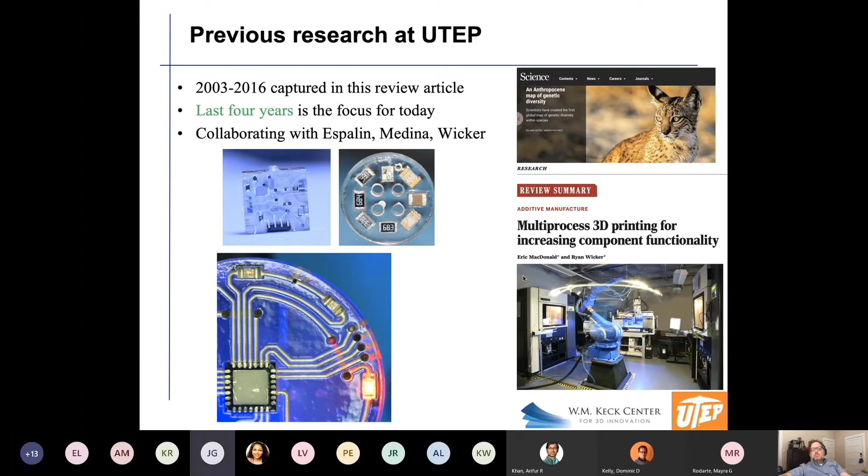In the period that I was here, 2003 to 2016, we did a lot of really interesting research at UTEP. These pictures on the bottom left show 3D printed electronics. I worked with David Espalin, Frank Medina, and Ryan Wicker in the Keck Center, and I'm really coming back for those researchers. But I'm not going to talk about that today. If you're interested, right as I left, we had a review article in the journal Science that gives a really good overview of all the work done at UTEP and at other schools. But UTEP dominated during the 2003 to 2016 timeframe. If you need that article, let me know and I can get it to you.

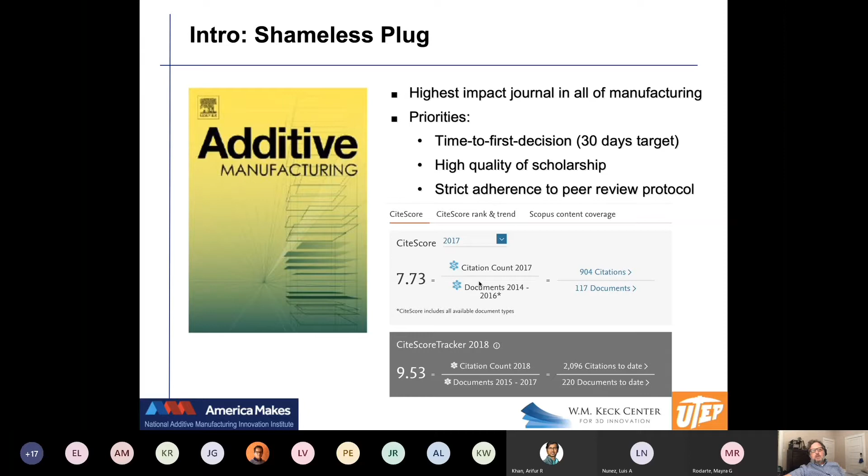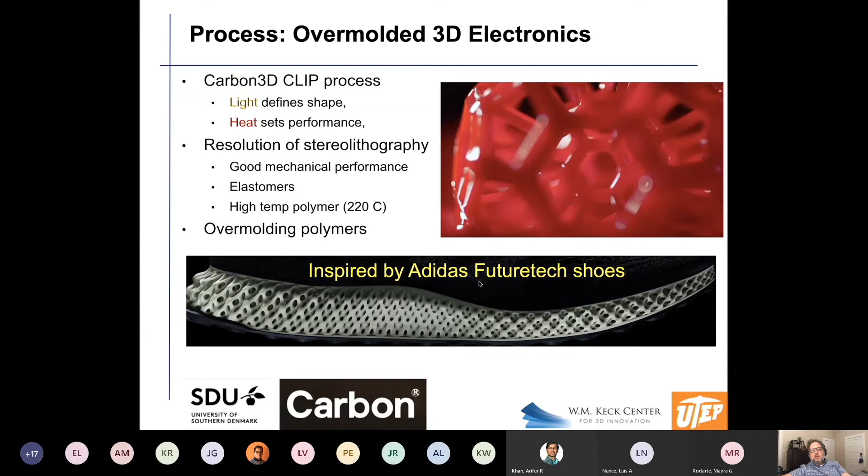So I was telling you that I'm not going to talk about what I did at UTEP, which was 3D printed electronics, but I have had about 10 or 15% of my research in the last 4 years while I've been in Ohio. I went to Youngstown State, which is the backyard university for the America Makes Institute, which is a federal institute for 3D printing.

I kind of went there to get closer to the mothership. UTEP is a satellite university of that institute. But I went there and just got access to different things and got to learn new things. And some part of my research remains 3D printed electronics, or at least when I was there.

And specifically, if you see this shoe, that photopolymerization has come a long way. There's new processes which are faster. The materials are incredible. They're durable enough that they can print shoes, which you're going to step on 100,000 times. And it's just a testament to the durability.

But what they do essentially is in one way or another use light to set the shape. And then they have some sort of thermal UV cure after the fact to sort of imbue the mechanical performance, the mechanical properties that are much better.

And so what I've been trying to do is something called overmolding, where I could take two pieces that have a complex, mating surface, and I can, like a 3D jigsaw, put these together after they've been printed, put them in the UV curing oven, and they consolidate. And the idea then is all those superficial surfaces can be populated with electronics. You could assemble it and then overmold it and cure it together.

And you can have 3D printed electronics where you have the wiring, sensors, microprocessors, just in any arbitrary location in any orientation inside of a complex structure. And so the shoe is what really got me excited.

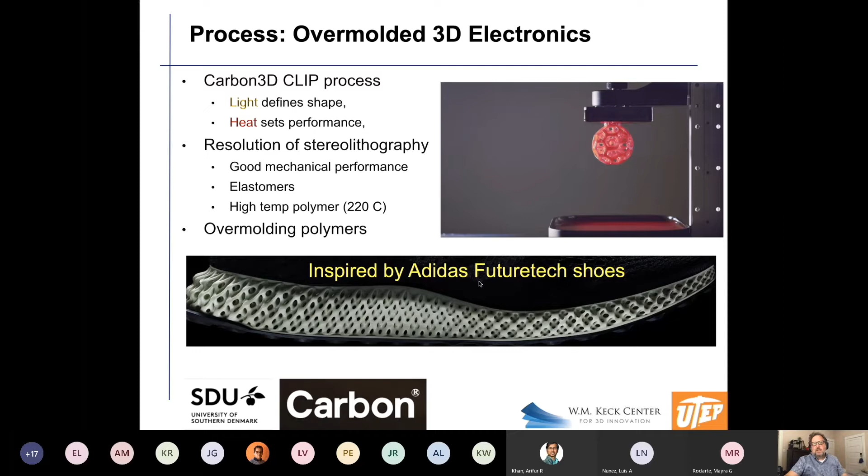I got invited by the CEO of Carbon 3D that does the Adidas shoe. Unfortunately, I never really got very far with that team. They're a startup and they're really busy. But I did get something better that I'm about to show you in a moment.

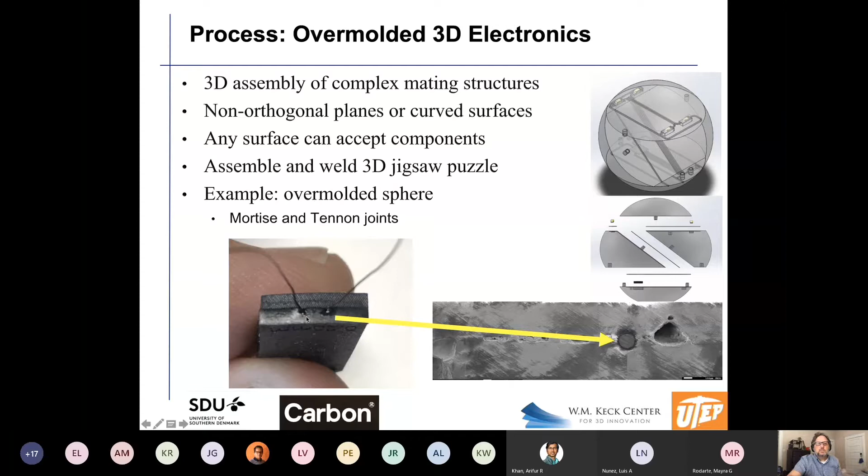So here you see the sphere to the side. You can see how it's 4 pieces, and you can see that there's electronics inside of it, and then it comes together, and it might have a mortise and tenon system to increase the surface area and help in the mechanical connection. But once you print those 4 pieces, assemble them, put them in a UV oven, it becomes a solid sphere with embedded electronics. And here's a little tensile bar with a couple wires sticking out of it, just an early example.

And so this is a video. Now, this is not Carbon. This is Formlabs, and it's a material called Rebound, which is going into the New Balance shoe. And it's not available, but I talked the company into printing this lattice structure for me, which was the work of a PhD student. And you see there's 2 wires going into it.

And I don't hit very hard. That's a little embarrassing. But the idea is that we're making a complex capacitive sensor that can measure deformation. And if you see my computer in the background, you can see that we're actually live streaming that. And that whole little red board can be consolidated down to just a small chip that can be hidden in the lattice, which is sort of the next step. And we're working on that.

I published a paper if you're interested. Anything in green text is a paper that's been published or will be. And so if you're interested, you can explore it a little bit more.

And all of this was really inspired by the fact that the NFL, the American National Football League, had a symposium in Youngstown because of America Makes, talking about this helmet challenge. So they wanted to get 3D printed helmets that could help to reduce concussions by really tailoring the mechanical performance of the padding inside the helmet with spatially varying lattices and so forth.

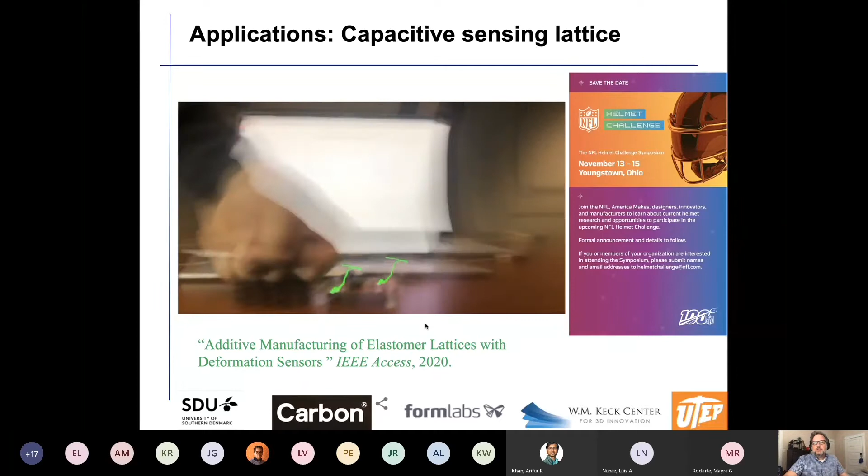Okay, so this is kind of interesting. I just want to point this out because there's a lot of grad students in here. Publishing papers in journal articles is the foundation of everything I do. Every project I work on, it's moving toward a journal article. And then that journal article can turn into a proposal and so forth.

But one thing that's interesting in today's age is that social media has become more important. And that video I just showed you, I put on LinkedIn, and it got 100,000 views. And it's fascinating to see who was watching it. Airbus, almost 300 people at Apple saw that video. Boeing, Intel. Siemens is a part of my team that I worked on with the NFL, so that's not surprising that they had a lot of people. But you could just see that it's all over the world.

India, France, New York, Boston, the Bay Area. And so it's just something to think about that, as a researcher, I'm really kind of a used car salesman. I'm out selling my stuff, right? Saying, look, I've got the solution, give me some funding and let me pay my grad students to go and explore it for you. And this is, I think, a powerful new avenue.

I think you still have to publish those stodgy journal articles, but I think at the same time, 10 or 20-second videos that quickly get to the point and show a compelling story are very important in today's age of Facebook and Twitter.

So just a couple more cool videos. This was a paper we just submitted, but we're trying different types of materials and different lattice structures. Siemens, a group at Princeton, New Jersey, in their advanced research group, has a geometry generation software group. They generated the lattice here, which is spatially varying. And then we took 2 materials, one that was compliant and one that was more stiff. And we are looking at high-speed imaging here of absorbing energy. And we made it to the very final stage in the NFL challenge.

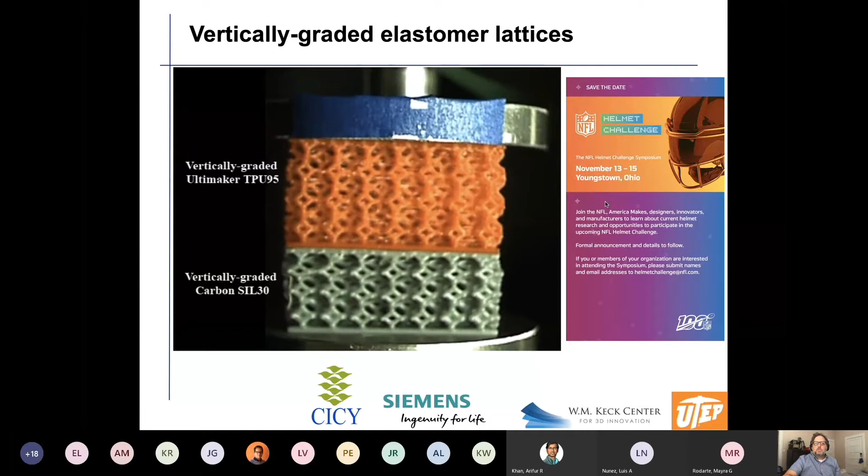There was $1 million up front that you could get, up to $1 million or share. But we didn't have a helmet manufacturer on our team, so we didn't make the final cut. But those that did are now in a 1-year contest that next summer they will hit a helmet at 6 different locations at 3 different speeds, and they have some sort of test that they can get a metric. And if you can beat a metric, there's $1 million. They do this every year. And so now that I'm at UTEP, I intend to do this again, hopefully next summer, going for the summer after that. And we're continuing these studies with Siemens. And there's also a research institute in Merida, Mexico, that is working on this with us.

And actually the football helmet challenge specifically says that you have to have a helmet that would last 10 years, as opposed to, say, a motorcycle helmet where you would throw it away if you had an accident. This would be appropriate maybe for a motorcycle helmet, but not for a football helmet. And this paper should be coming out pretty quickly. We're doing testing right now, and we're working with a company in Poland that does this material. They are the only ones so far that have this soluble material. It's just a matter of time before it becomes commercial. But we're trying to publish a paper early on.

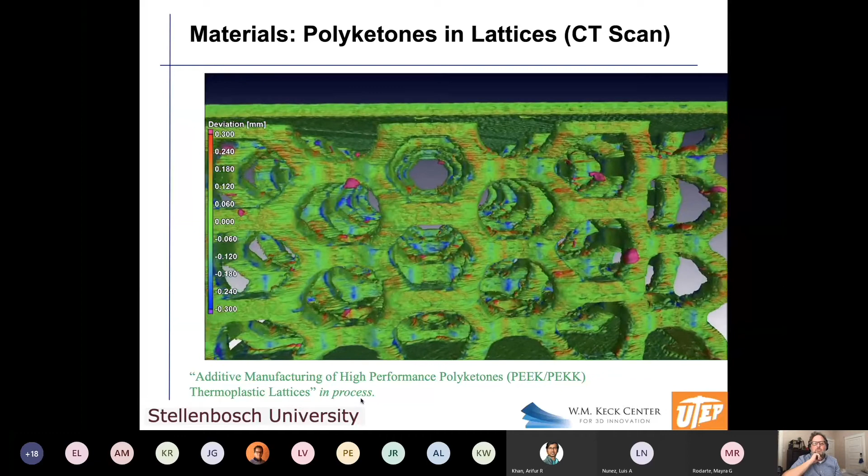And then this is interesting. This is a South African university that's helped us. They're doing CT scans. The color coding here is CAD compliance, dimensional compliance. So green is good, those pink zits are terrible. Well, they're not really a problem for the mechanical performance, but that same piece you just saw get squashed, you're gonna see the compliance of this in terms of CAD to actual.

And this always makes me want to eat Skittles whenever I see this. I don't know, do you guys see the video? I guess I'm hoping you see it. We're flying through the lattice right now. Yes, we can see it. Okay. All right. Does it make you want to eat Skittles also, or no? Is that just weird? I think nerds.

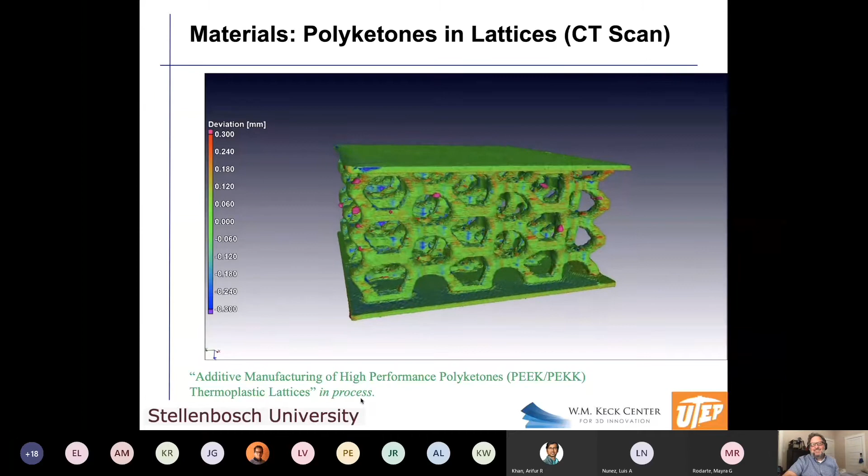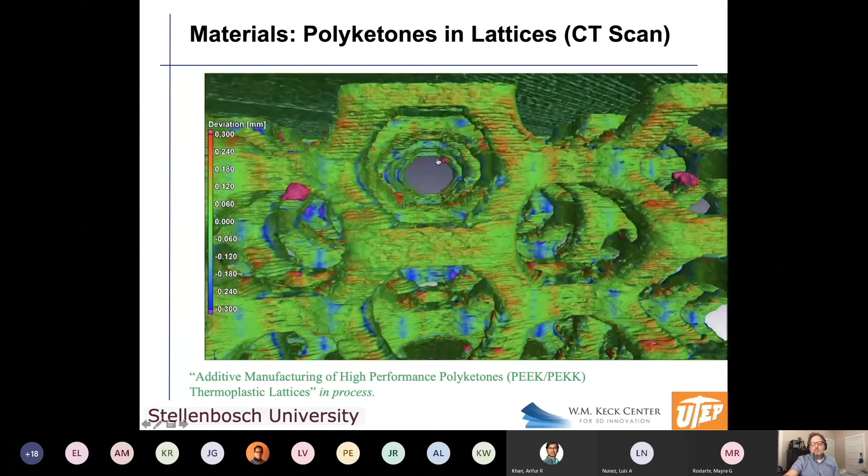Got it. But in any case, very high performance plastic now can be made where you have these overhanging structures in complex lattices. And so the idea of energy absorption, very interesting stuff, but probably not the NFL.

So, I told you that I'm not doing a whole lot of electronics, but I guess I'm continuing to show you more of them. This is something I did with Carnegie Mellon and Rutgers, where we did a microcontroller. We have a little carbon nanotube well here to make a sensor. This is one puck. We put the electronics in, connect them together with conductive inks, and then we have a top lid that goes over it.

It's a dome-like feature. And notice it has microfluidic channels that go down to the sensor, which is sensing explosives, or a precursor for explosives. Pedro Cortez is a chemical engineer that I work with at Youngstown State, and he came up with the sensor. But the idea then is we're overmolding those two pieces together. That protects the electronics, but yet we still have access to the sensor with these 3D fluidic channels. And it's just really interesting.

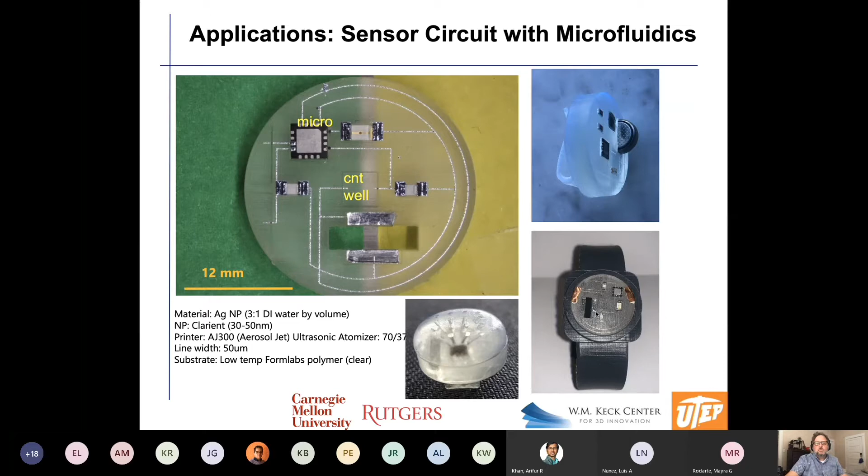And my PhD student at Youngstown State, who's still there, is working on a variety of different wearable applications of this. We don't have any publications on this, but we'll soon. And then this is kind of a cool project. This was done a long time ago at UTEP.

But I got another project at YSU where the CEO of this company, which is a Sandia spinoff, they do this aerosol jetting where they put down these ultra fine lines and can go right to a silicon chip that's unpackaged. This is basically a computer without the package. And each of those little dots on the side are like the connection points. So we can basically connect it, we can power it, we can program it. It's a full computer and it's about 2.5 millimeters on a side.

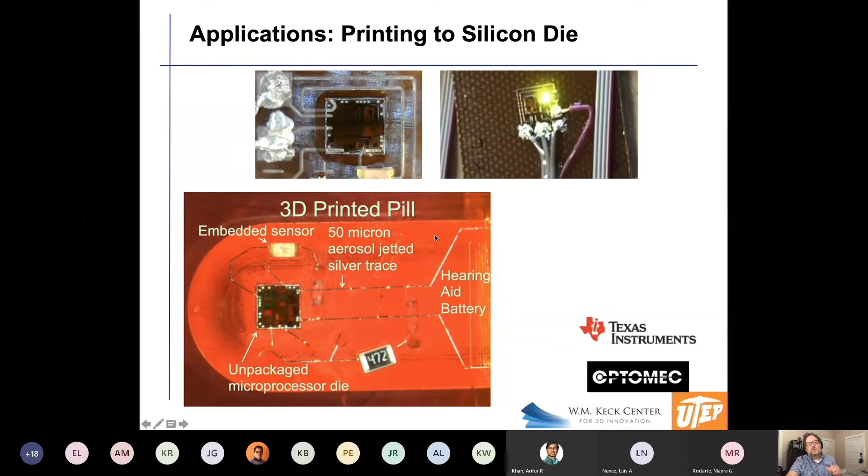And in this case, it's in a pill, so you potentially could have a computer in a pill and it would be ingestible, which is interesting. Unfortunately, this red material, I'm pretty sure is toxic. So you would never want to take this pill, but the idea just as a demonstration is kind of cool.

And I don't have anything to show about this, but at Youngstown State, we just landed $7.5 million from the Air Force Research Labs. It's congressional funding from our congressman there, who actually works with Veronica Escobar closely, but it's not like this was merit money, like where I went to the National Science Foundation, but it's still funding.

And it's trying to figure out ways to 3D print things in such a way that they have a unique signature that is impossible to replicate, so that somebody can't make a 3D printed electronic piece and say, here it is, this is what you built. And you find out later it's got some sort of latent defect intentionally introduced into it that could cause a plane to crash or something like that. In any case, I intend to continue working with Youngstown State, get some UTEP students involved in that. And there's some interesting things we can do.

And then, okay, so now I want to switch gears a little bit and say that UTEP is known for ceramic printing, but Youngstown State also has some interesting stuff. We were the first city in the United States to get an Israeli printer called the XJET. It material jets down a nano solution of ceramic particles. So you get the resolution of ink jetting, but then you have to put it into a sintering furnace to get fully dense ceramic.

And it's really interesting. This is not me. This is Draper Labs, an MIT spinoff, and it's inspired me to basically try to reproduce this. So here you see the sinusoidal disc, and in it, with aerosol jetting, you see a spiral of silver, which is an antenna. And what's cool about the zirconia ceramic, two things. One is it's low loss for electromagnetic radiation, so it lets radio waves get through. And it has a permittivity of 30, which is the highest permittivity printed near full density.

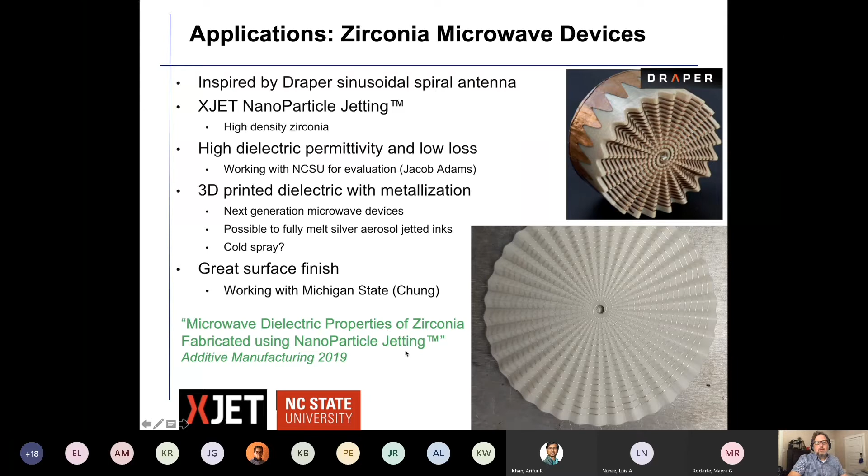And so permittivity, if you're not familiar with electromagnetics, basically is related to the speed of light. So if it has a permittivity of 30, electromagnetic energy slows down by 30 when it goes through this. Now, the reason why that's interesting here is it sort of makes the antenna look larger because the wavelengths are extended. And so you have this small antenna, but it looks like the size of a Volkswagen. And we worked with North Carolina State to do this paper where we really examined that. And that was a year ago. But this is why it's cool.

This is a ceramic lattice. So ceramics are just hard to print, right? They have a really high melting point, so they're just not printable generally. And when you put them in a furnace, they want to shrink and they want to crack. And so it's really difficult. But this is a lattice with 1 millimeter unit cells.

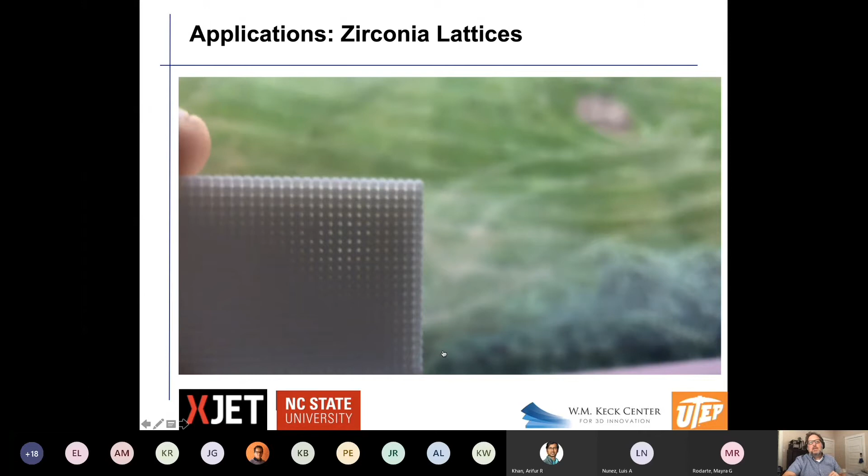And what's cool about this, and maybe I could show it here, is I can spatially vary those. So over here, you can see that same lattice spacing is there, but it's much thicker. So the ratio of zirconia to air is much higher than over here, where it's more air and less zirconia. And it turns out that when you do that, the effective permittivity can be changed from one side to the other, which means you can change the speed of light from one side to the other.

And there's just some fascinating applications of this, really, to do lenses. So there's a professor at the University of Arizona that had this thing called a Luneburg lens. It's a lattice and it's sphere shaped, but it's dense in the center and it gets progressively less dense as you go out. And so as electromagnetic energy comes in broadside, not light, light would be at too small of a wavelength for this, but radio waves come in broadside and parallel, and they get focused to a point on the other side of the sphere. And so there's really interesting things going on there.

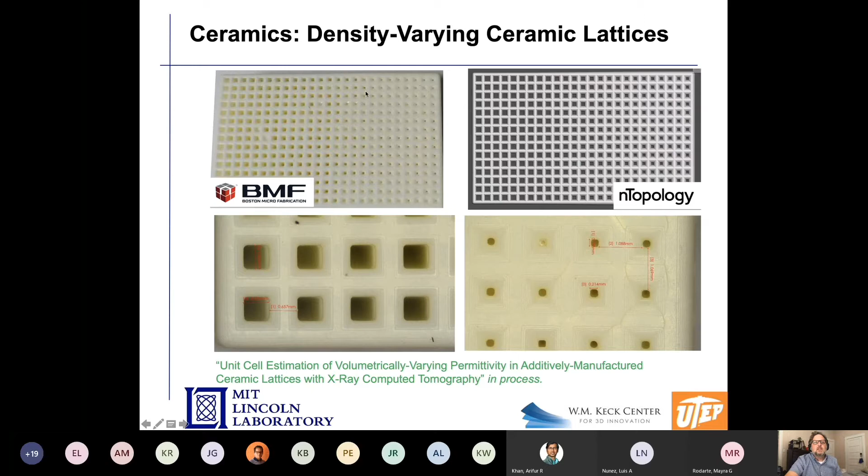We're working on a paper right now with Lincoln Labs, which is basically a research center at MIT, and Ohio State, and actually a university in South Africa that's doing CT scans, and they're giving us the effective density of each cell. And so we're trying to do electromagnetic simulations with that. And so, yeah, okay, this is a really cool project.

It hadn't even started. I got contacted last week by this company called Made in Space. They have a printer in the International Space Station, just a regular material extrusion printer, and it's been there for a long time. David Roberson had a project where he worked on investigating recyclability of the thermoplastic filament, so that an astronaut could do an experiment with the wrench that they printed and then scrap it, pull it into filament, and then print something else. Because when you're in the International Space Station, you obviously don't have access to new spools of polymer. And so recycling is very important.

But these guys are using vat photopolymerization now, which doesn't make sense because vat photopolymerization has a vat of liquid plastic. And in space, I'm guessing it's just going to float off into globs, right? So they figured out how to do that, which is cool. But what they're really interested in is putting ceramics into them, and you can print them, and then you can fire them in a furnace in the International Space Station. And they think that the ceramics are going to get a big boost in performance because they're fabricated and sintered in a microgravity environment. And so they have a printer on Earth, and they have a printer that's going into the International Space Station, and they're asking me to collaborate with them.

I just talked to them last week, so I'm not sure where this is going. I'm not even sure why they're coming to talk to me. I guess I've got a lot of publications on ceramics, but to be able to print something in space, I'm so pumped. I can't even tell you. I couldn't sleep the night I talked to them.

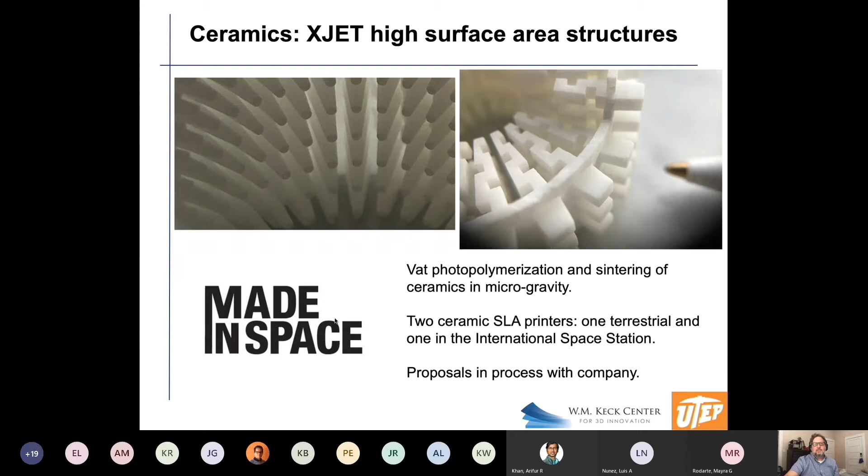And then, like I said, ceramics are a nightmare to print. And the reason why is because they crack. So I printed these little 1 centimeter cubes. I sent them off to my friend in South Africa, who I met because the second oldest 3D printing conference is RAPDASA, and it's usually in like Johannesburg or Cape Town. I've been twice. I'm going to be actually a virtual keynote speaker there in November. But this professor's really good at CT scans. So I sent a bunch of parts to him, and he goes, "Man, your parts are terrible. They got these cracks right in the middle." And it's like, oh no, that's terrible.

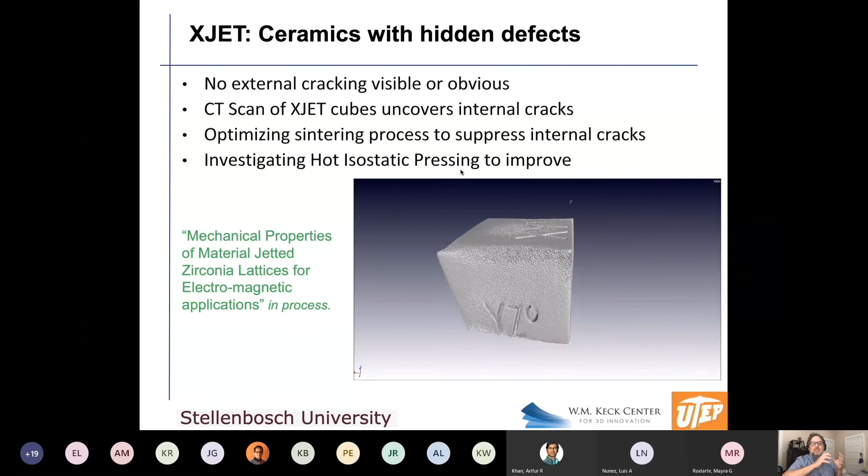And so we're trying to figure out how to sinter them, maybe more slowly, where we ramp up the temperatures more slowly to fix this problem. But there's something called hot isostatic pressing, where you can put these into basically a hot liquid oil, and it gets compressed at really high pressure, really high temperature. And they do this often for titanium parts that go into airplanes to close off internal pores. Any pore or crack that goes to the outside, the oil would get into that and it wouldn't help it. But any internal crack, it can potentially fix. And so we're about to publish a paper where this is that same cube. This is 2 different CT slices before and 2 different CT slices after. And you can see that that crack is gone.

But we just squeezed the poop out of it, and in the end, we got fully dense parts. Now, if you think about this also, that lattice I showed you, you could do that with that as well. And it wouldn't compress the struts together because the pressure would get into the lattice, but the actual struts themselves would get squeezed. And if there were any internal cracks there, this would fix that.

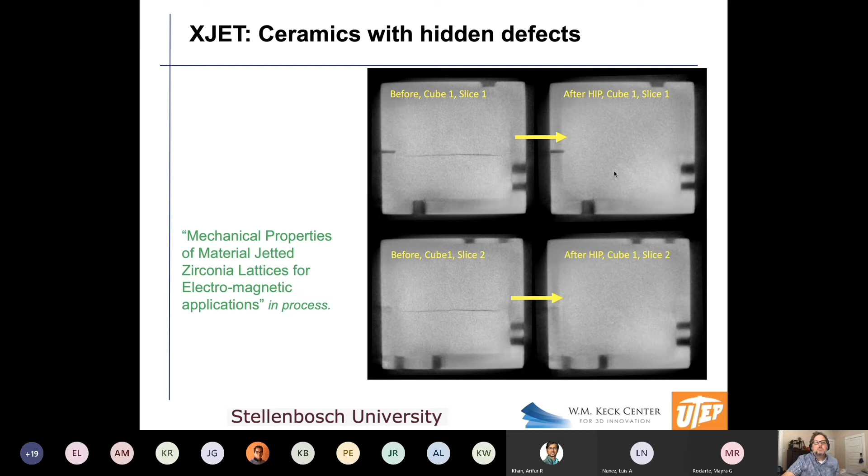And so another project with MIT Lincoln Labs is they have these inks that are tungsten and nickel, or a combination. And tungsten has a melting point of like 3400 C. So we're trying to do this overmolding idea that I just mentioned in polymers. We're trying to do it with ceramics now, where we can make 2 parts that have some sort of complex mating surface, and we can put the MIT inks into them, and then we fire them. Basically the ceramics consolidate. The tungsten might melt to some degree, particularly if we alloy it more with nickel, and we could get conductive materials inside of dielectric materials.

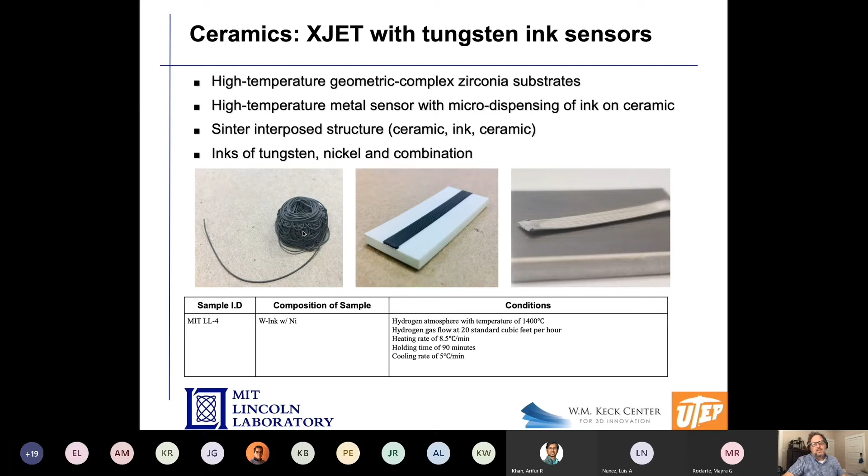And so this is an ongoing project. This is a tough one though, because melting tungsten's tough, and curing and printing ceramics is also tough. So this is sort of a very ambitious project.

And then I did another project where, I don't know if you've heard of Desktop Metal, but it's an MIT spinoff. They say they can print these metal objects with material extrusion, and they debind the plastic out, and they furnace it. And so I thought, well, I want to do an antenna, because they could do copper. I want to do an antenna that's just crazy hard, and I called it a pathologically complex antenna.

And if you hear the word pathologically, usually that means like a pathological liar. It has to do with pathology, which is your health, and it's usually about mental health and being a bad person. But in computer science, or in math, pathological means an intractable problem, like an algorithm that just can't be done. So that's kind of why we used it. It just sounds cool. Anyway, digital manufacturing of pathologically complex 3D printed antennas. That's just poetry. I love writing a good title.

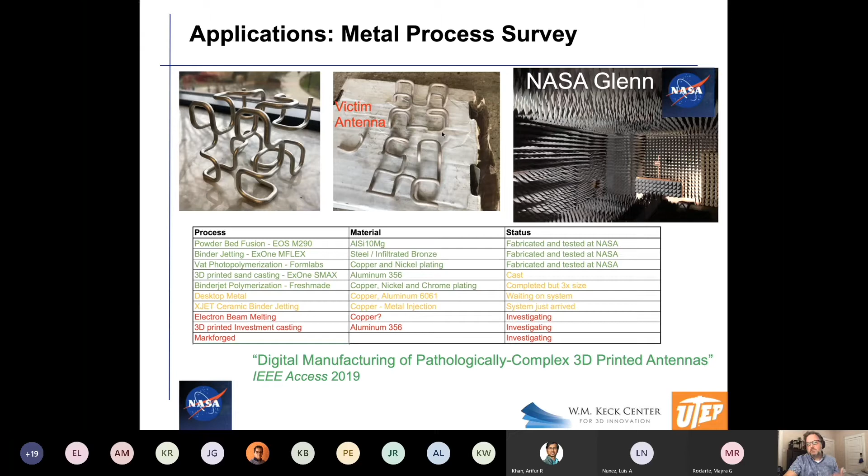They shipped it to my house in this box, and my 16-year-old daughter ran over the box, which was right outside the garage. You can see the tire tracks on it. And you can see this thing did pretty well. I mean, it broke right here, and it's certainly deformed, there's two different pieces, but it survived. And it's a very fragile structure with all these overhanging twists and turns, very serpentine. It was interesting, a testament to the strength of the materials in the latest generation of additive manufacturing.

But anyway, there's a company coming to pursue electromagnetics using additive manufacturing. And that could be the dielectrics, like I showed you with the zirconia, but it could also be aluminum in powder bed fusion. This was done with an EOS M290, which it turns out UTEP has.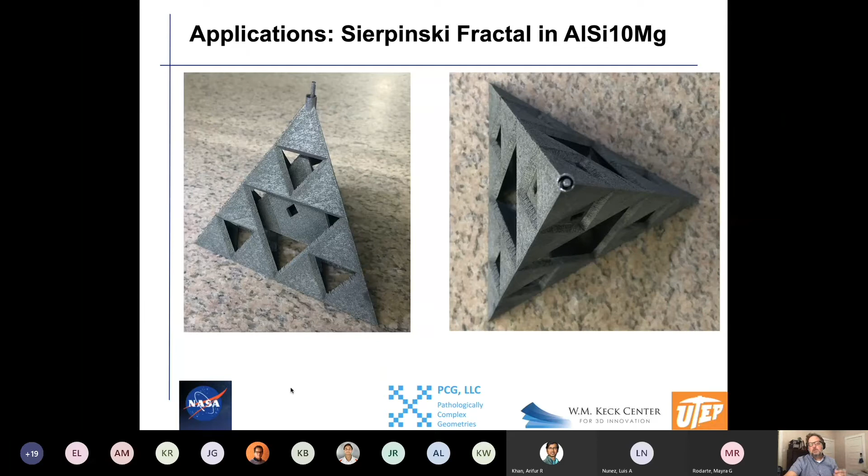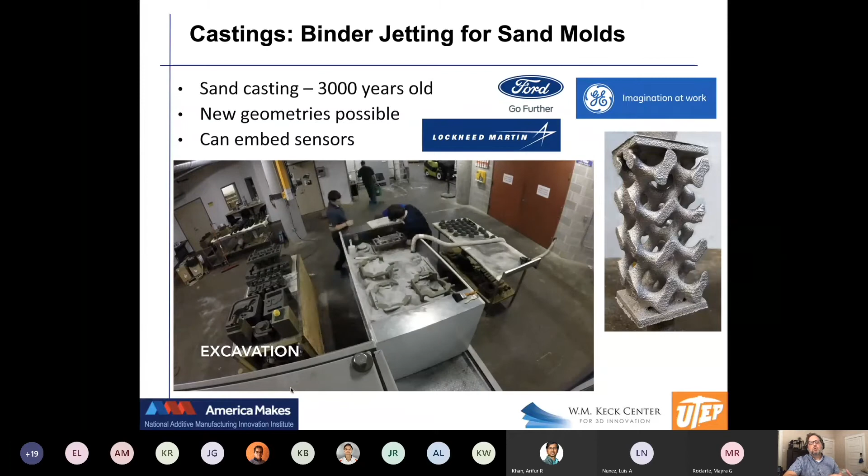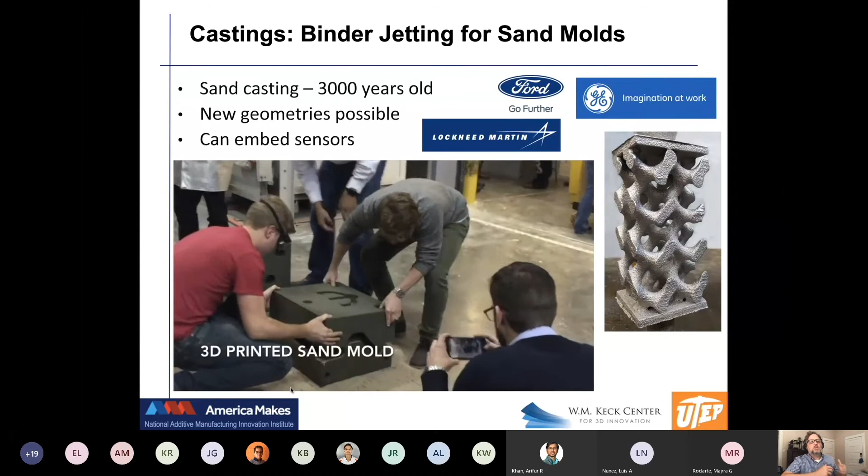Okay, so I'm going to switch gears a little bit. This is sand, and now we're inkjetting down glue into the sand. And what we're doing is we're creating molds that you can pour molten metal into. And this is what I've been doing a lot. YSU, Youngstown's a casting city. It's a metal town. It's sort of a rust belt place. It's sort of deteriorating. Every president since Reagan's tried to reinvigorate the city. It's like Detroit, kind of. So this is our attempt at doing that.

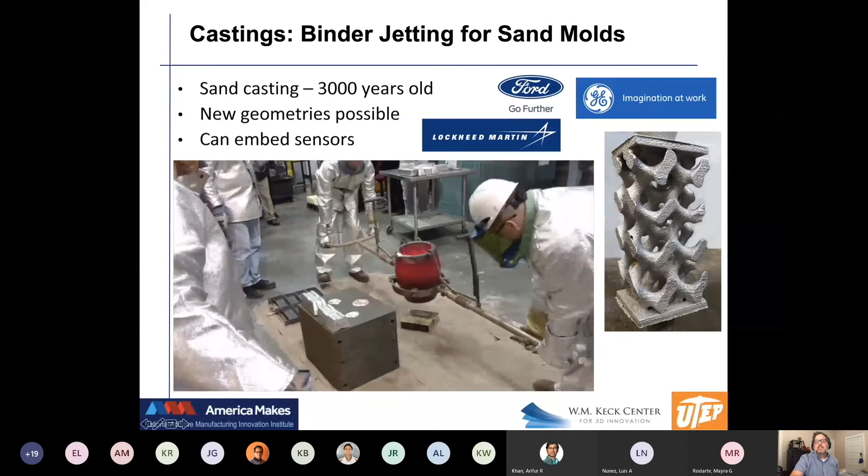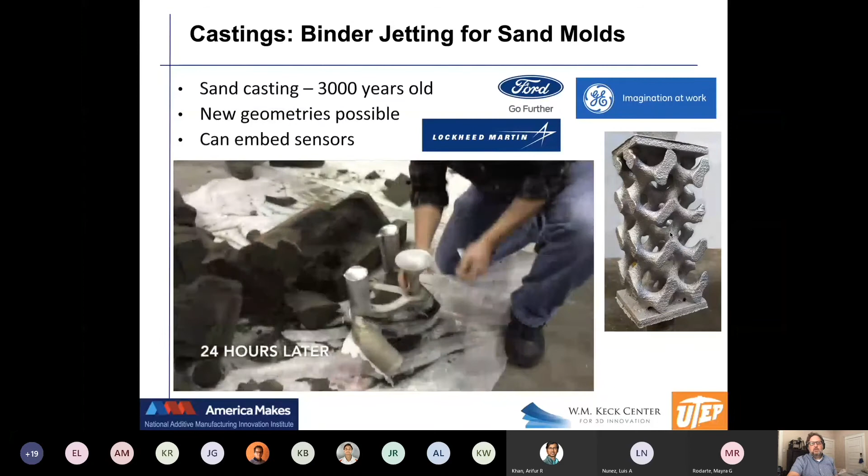So we 3D printed that green cube, and there's a hole on the top, and you could pour metal into it. You can make crazy structures you couldn't cast otherwise. So this lattice, for instance. Then the sand is disposable. You just bust that off, throw it away. Sand's cheap. Most of the Earth's crust is sand, silicon dioxide, and you can then make a casting you couldn't make otherwise. Okay, so that's pretty cool.

And I could scan your head, and I could pour metal, and I could make a statue of your head, and I could do that in about 3 days, and I could probably do it for $400. And casting, of course, is an ancient manufacturing technology. So what's cool about that is people trust it. They don't trust 3D printing, but they trust casting. But if you can 3D print the mold and then use a trusted process, you get the benefits of both worlds. I'm working with Ford, GE, Lockheed Martin, a lot of interest in this.

But that's not what I do. I shove electronics in this stuff, right? And so this is a little Bluetooth sensor. It's got pressure, temperature, magnetic field, rotation, acceleration, and I'll put it into little cavities. So this is 3D printed, and that's a core. And what that means is it's something that would be suspended into a cavity, and that thing gets basically submerged with molten metal. And for about 2 minutes, these electronics live and report to Bluetooth to my tablet all of this data that nobody's ever seen before.

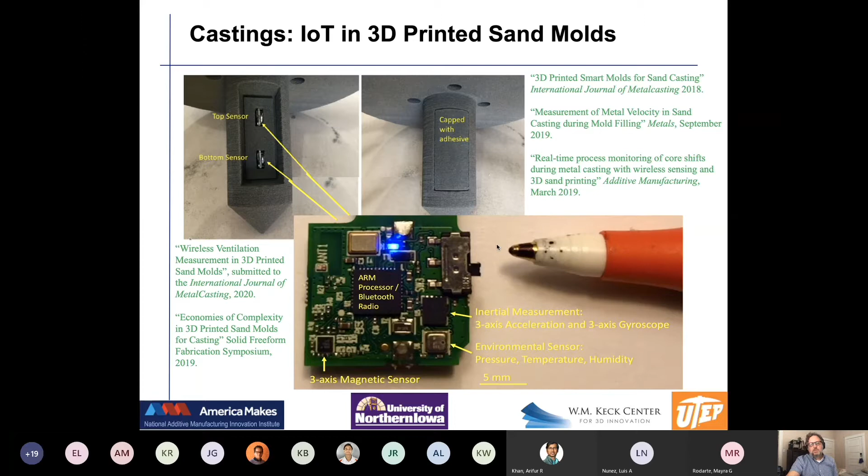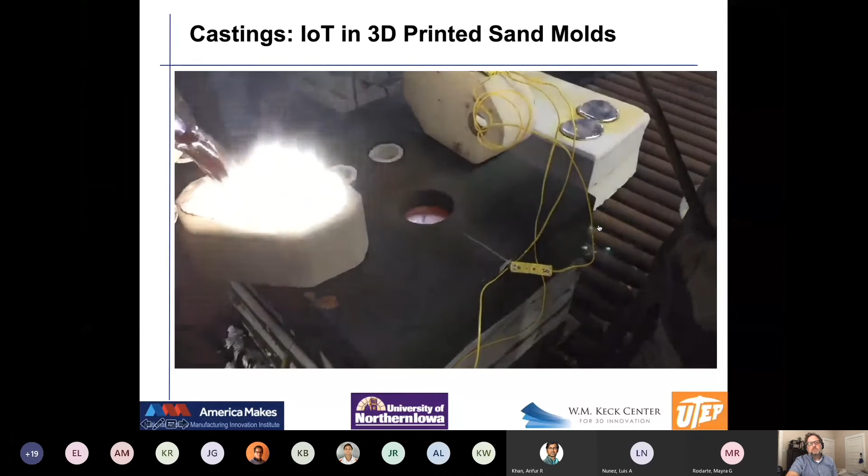It's just impossible to get this data without having some sort of wireless technology and a sensor in a very small package. And so we just published like mad on this. And yeah, it's just so cool. They last typically 120 seconds. So this is magnesium, and that's my cell phone right there. And there's a sensor deep inside of this 3D printed sand. I can tell you this is an aerospace part. And I can tell you that magnesium is very dangerous. And I didn't know that because I'm an electrical engineer.

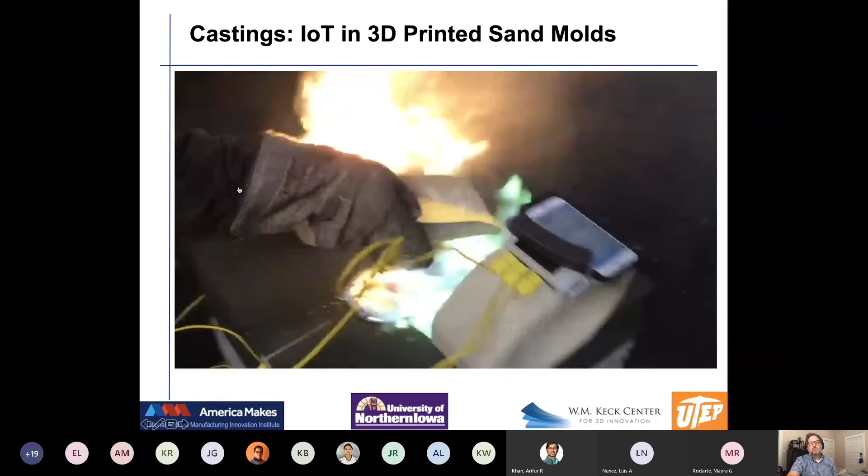But watch this. I'm going to go around and get near this stuff, and I'm going to show you my phone. And you're going to see that we're collecting data from deep inside of this mold. Acceleration, so that tells me if something shifts, if something gets banged, rotation, humidity, pressure, magnetic field, just so much cool stuff that's unprecedented. Nobody's ever done this. And so, you think about UTEP, it's a metallurgy school. It's one of the 6 last metallurgy schools. So I'd really like to do a lot of this Internet of Things and 3D printed sand molds moving forward.

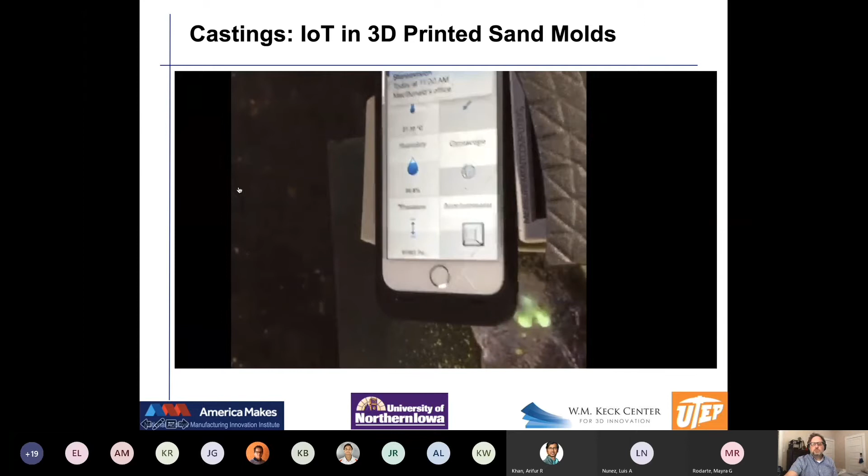Here's a project with Penn State. Now this is simulations of 2 molds, a traditional mold. This is a casting, and this is the sprue and the gating system. And the color is the speed of the metal. And you don't want metal to go fast because there's turbulence, air entrapment, and it causes porosity. And you can see in the CT scan here that this doesn't do very well. Here, Guha Manogharan basically does a helix, and he throttles back the velocity, and it fills up at like half the speed, but it fills up slower and with much less porosity.

And so what I did was put magnetic sensors down at the bottom of this runner inside the mold, and I could tell when the metal went by one point and the other point, timestamp them. I know the distance, I get the average velocity of the initial front. And so we wrote a paper with Penn State on that.

And I just think this is cool, but this idea, that's molten metal that you're watching flowing, right? It's a simulation of it anyway. And there's just so much cool stuff you can do with 3D printed sand and molten metal. And molten metal is just so much fun.

I mean, you saw my phone was cracked in the last one. Actually, that was because I dropped it the day before. I did have a student that dropped a phone into the molten metal, and it caused me a lot of grief because I used my P-card, and I bought her another phone. And I guess buying student cell phones is, I mean, to me, it was data acquisition, right? It was laboratory equipment. I'm just buying more of it, but I got in a lot of trouble for that. They took my card from me for like a month.

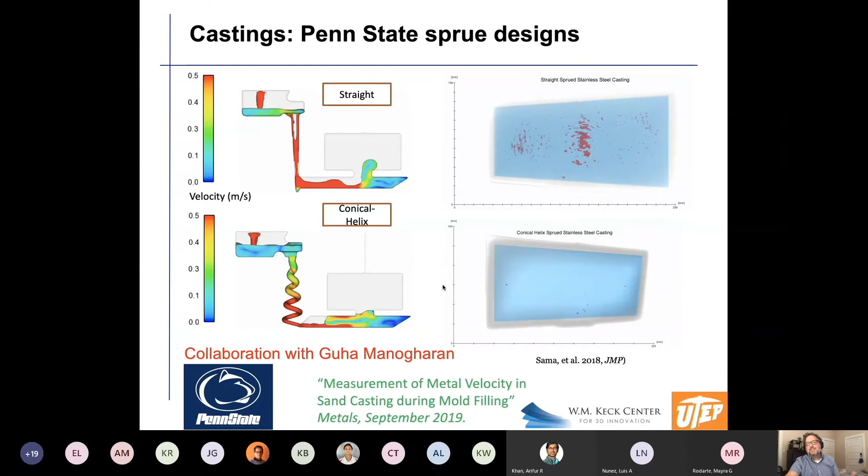It's terrible. So here's some 3D printed sand. This is an experiment I did like 2 weeks ago. And what's happening here is this thing fits down into a cavity also, and it fills up. And these, there's 4 of them, are cores that hang down from the ceiling. And as the metal fills in, this sand, which is 3D printed, starts to decompose and it builds up pressure. And that's a real problem.

And so we're measuring the pressure with these 2 sensors for redundancy. And we're hoping to actually cause, in some cases, bubbles to pop out into the metal and cause problems. And then in this one, there's no ventilation, but this hole right here is like a chimney that goes all the way down, and it lets the gases escape more easily. And that's an advantage of 3D printing.

And so we did that, and sure enough, we see that the unvented case goes up higher. The really vented case still has pressure, which was a little surprising, but not as much. And then there's 2 intermediate cases as well. And we're hoping to get a paper. We're in a revision now. This wasn't enough data for them. They wanted us to do more work. And then I submitted this right during the pandemic. It's just been a real pain. But I think it'll be a seminal paper.

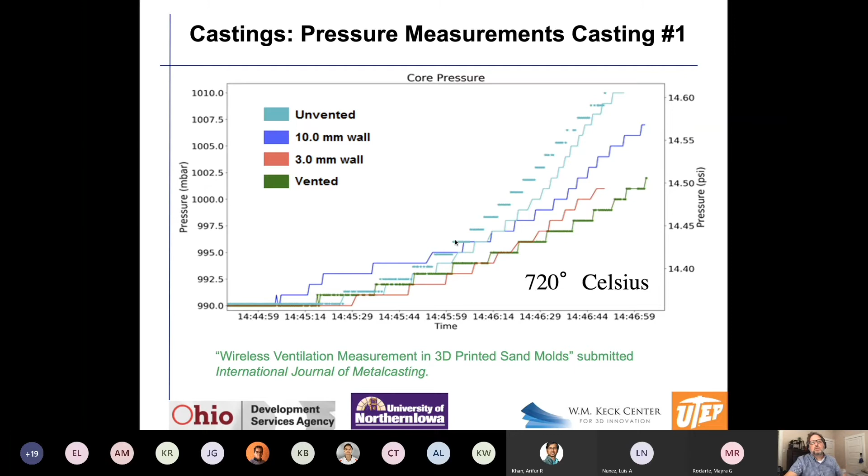And then this is really cool. So one of the things about 3D printing sand is you can do these lattices. The problem is if they're spatially varying like this, they're thick here and thin here. You pour the metal here and it comes down and fills in, and it'll prematurely freeze. These lattices have such high surface area that they freeze off early. This is like 2 inches shorter than it should be.

So we have a project with this furnace company. We're going to put coils around the core, so you can't see, but that lattice is in this core as a negative, and the metal comes down, over, and up, and we're going to put electromagnetic energy into it to keep it molten, and also the electromagnetic energy will push it up by something called the Lorentz force. And so here's an example of us doing a simulation of that.

So this is another tragedy of the pandemic. It should have a paper already, but it's on hold for now. But I think it's just a really cool idea. And I love to print lattices.

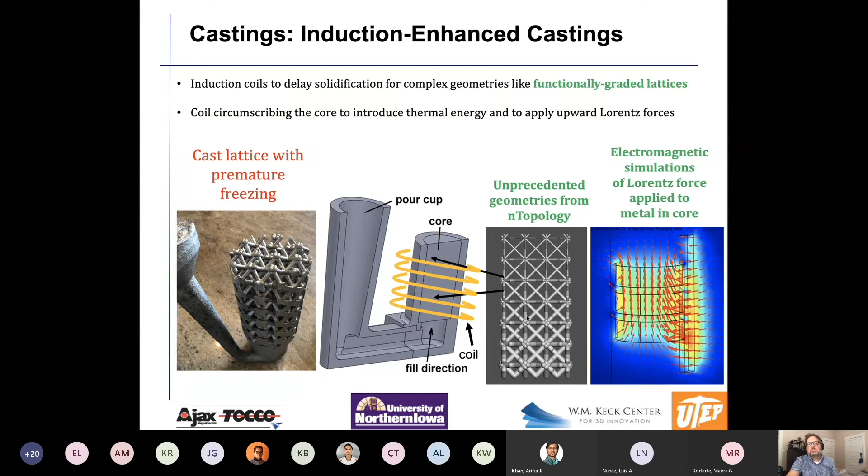You can see that. But these metal lattices, particularly like this, spatially varying, I want to get one of these. They're like 8 inches tall, 4 inches in diameter. Take a sledgehammer, and it's just going to immediately give because it's got tiny little struts. But the farther you go in, the thicker and stronger it is, and it'll slow you down. So you think about the applications of a car bumper or something like that. You could really minimize damage and absorb energy at unprecedented levels. So yeah, I got a lot of work going on in that.

IoT. So it looks like we got another logo here for a company that actually I've had for like 15 years, but I'm resurrecting it. Do a lot of IoT. These are the sensors you just saw. TI has some really good ones. They're a little bit bigger.

And then this is a Raspberry Pi. It's a Linux computer, and you can put a hat on it. So Alex Gomez, who's probably on the line, is designing one of these. And Callan Herberger, who's also probably on the line, is writing the software to basically get this data from the molds out. This is bigger, but we think we can get it down to like $5 or $15, so they're just disposable.

You just throw them in the mold, pour metal, forget about it. And we've got this thing, because it's a Linux computer, can serve up a website, right? So you can actually write in the IP of this sensor inside the sand, and it will start reporting to you in HTML and show you the data that it's collecting. And so it's just really cool. And so there's definitely some commercialization opportunities here.

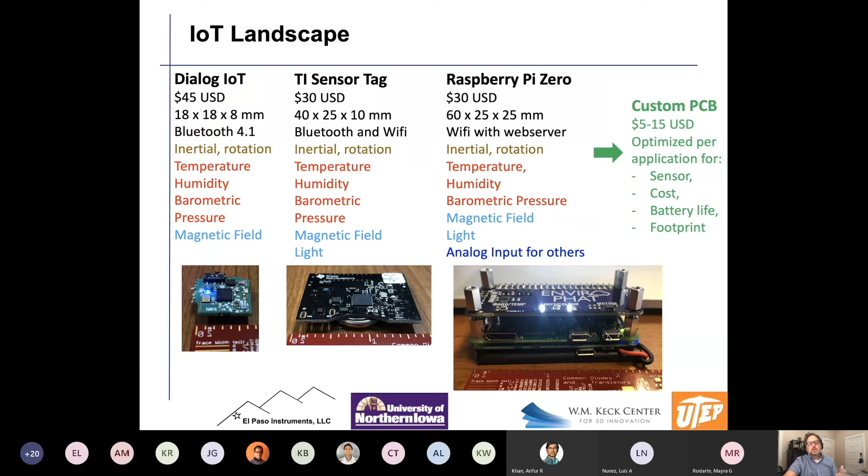And there's a lot of interest in just reinvigorating American manufacturing by juicing it with electronics, taking this 3,000-year-old barbaric casting process, which is so cool, and then just making it smart. And I think there's really nobody that's doing this kind of work. And there's a lot of people watching it. I was invited to be the keynote speaker at the American Foundry Society meeting in Cleveland, which unfortunately was virtual, but it was pretty interesting.

Pretty close, I think, to the end of this. I'm sorry, I'm going fast. It's a fire hose of data.

Another thing I do is a lot of computational geometry, like trying to measure complexity. If you're going to cast this, you have to have 3D printed sand. If you're going to cast this, you definitely don't want 3D printed sand. It's too expensive. So can you somehow look at an object like this, it's just an impeller in a gas turbine, and can you look at it geometrically and say, wow, that's complex, you better 3D print it, or say, no, please don't 3D print it, it would be a waste.

And so I've been doing, and this is like a very poetic title, the economies of complexity in 3D printed sand molds for casting, as opposed to the economies of scale, which I'm trying to coin that phrase. I think it's kind of cool. But the idea is, can you mathematically determine how complex these are? And I've got another paper coming out with a couple famous metallurgists, which has been kind of stuck.

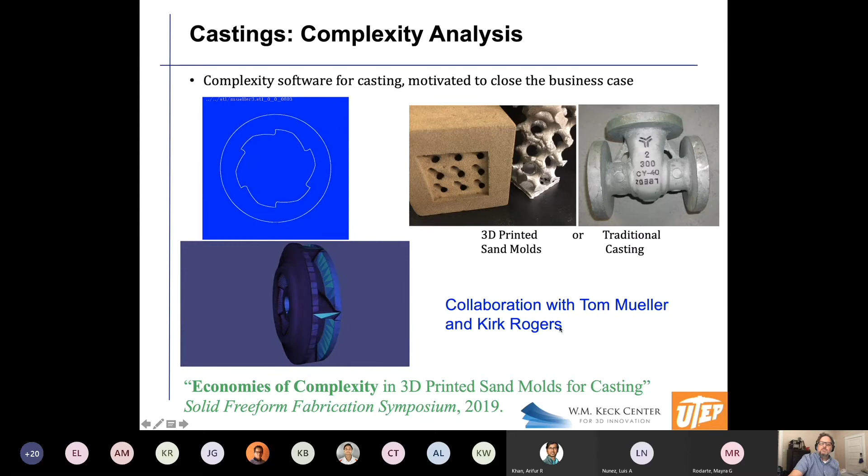But okay, a couple more things. I think I got 2 more things to talk about, and I'm trying to go fast before you guys go to sleep.

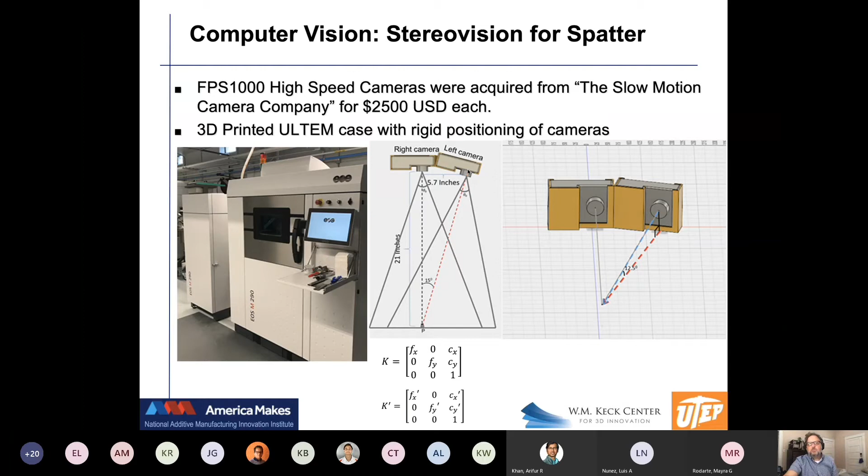This is an EOS M290. You've got one at UTEP. That's the one at Youngstown. I do high-speed imaging, just like your eyes. If you have 2 cameras, you can do binocular views, and you can judge depth, and you can do a 3D image basically. And so that laser is coming down, lasing the metal powder, and stuff shoots off called spatter, and it's not good. But if I can see that spatter, identify where it starts and stops in a 500 microsecond exposure, like in this example, it stopped.

You see 2 spatters right there. There's a third one that's not identified. I can tell you where it starts, where it ends in 3-dimensional space. I can then tell you how fast it's going, where it's going, and how old it is. And so we were doing a bunch of studies on spatter tracking, because spatter oxidizes, and if it falls back down onto your design, it can introduce a defect. So understanding spatter is just something that they don't really know yet. And there's a lot of research in it, but I think I'm the only one that's actually used stereovision to track it in high-speed imaging.

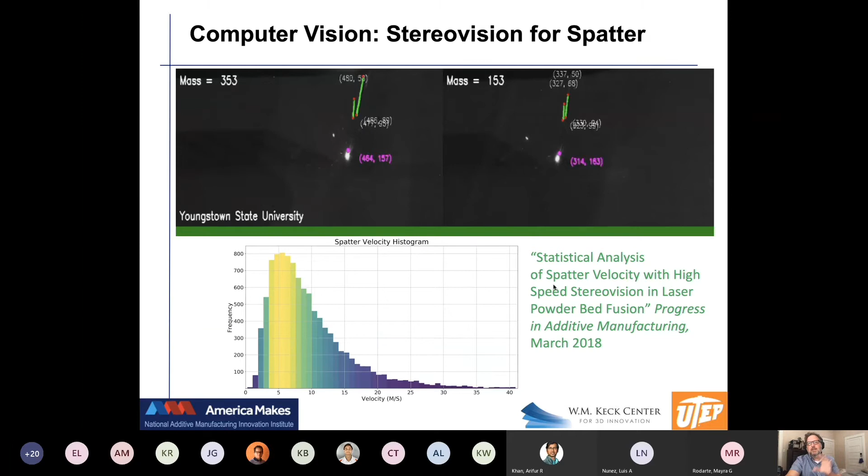And this school is cool because it's Albert Einstein's alma mater. And of course, Switzerland's just cool. If you don't know, it's a really cool place to go visit.

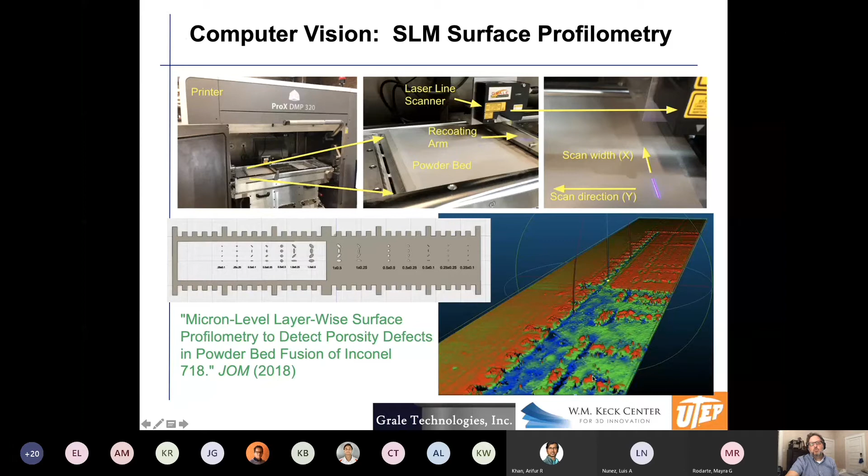Mountains, Alps, it's beautiful. So give me an excuse to go there, because I think this could really be commercialized to improve the quality and the yield of different powder bed fusion systems. And then this is powder bed fusion. So there's the laser.

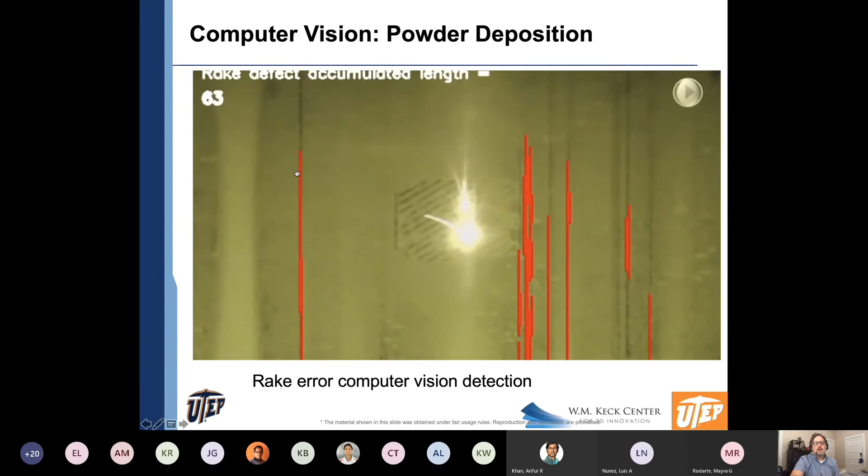But look, now it's 55. So you got a problem maybe. Now it didn't go over the build, so it doesn't matter, but just sort of an interesting application of computer vision to improve additive manufacturing. And then I'm pretty sure this, no, maybe this isn't the last thing, but this is really cool.

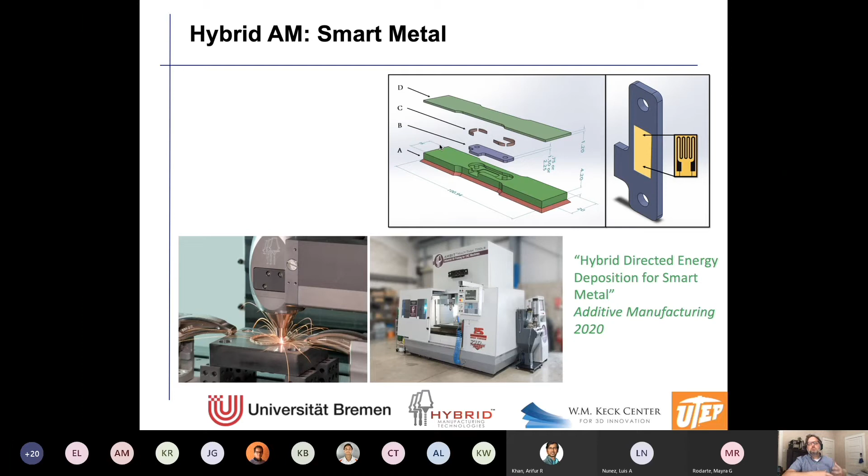We put them into this cavity, and then we basically laser clad over it. We could measure the temperature while it was being made from within the object. And then we pulled the tensile bars and we could measure the strain. And so here's the sensor that the Germans did for us, which is kind of cool. It's that yellow thing. And we're about to do another one. And these are the 2 contact points you use to read it.

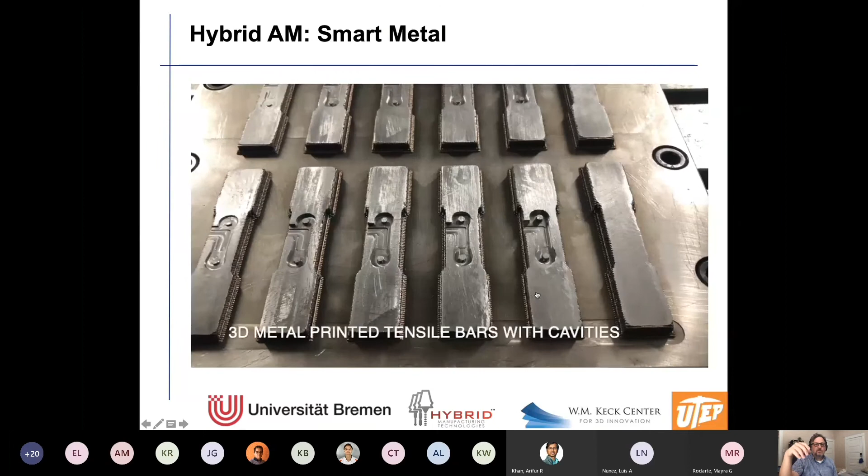And this video kind of shows the evolution of that insert. I think this is a technology we don't have at UTEP. It's directed energy deposition based on laser cladding, but I'm definitely going to be working on that. So there's the insert from Germany stuffed into that tensile bar. Now watch this number here, which is resistance.

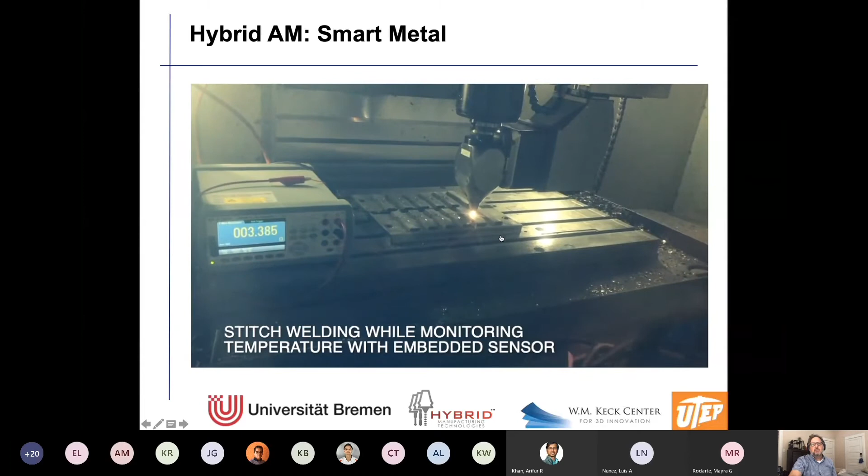I'm going to stitch weld these in. All we're doing is popping it with the laser to melt it, so they become one piece. And look, you see it climbing. It measures that. But then we're going to put metal on top of it. So you're going to see spatter shooting off. You see, I don't know if you guys can see that, but it's adding metal line by line. And this thing is reacting to it.

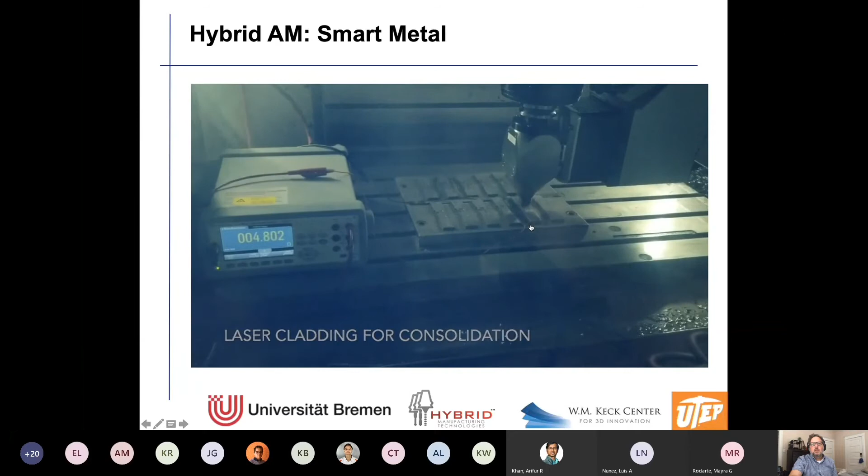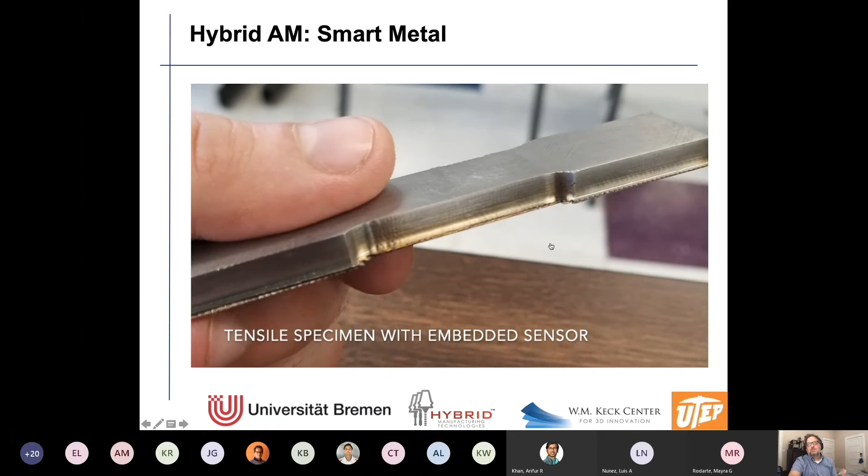And then this is the cladding. It looks terrible, but we can machine that. And you get these nice smooth surfaces. Only 2 of the 10 survived, by the way, because we just melted the hell out of it with the laser. But we did basically, and there's the 2 connection points. So you have a sensor in a place a sensor shouldn't be, right? Where you normally wouldn't be able to access the location.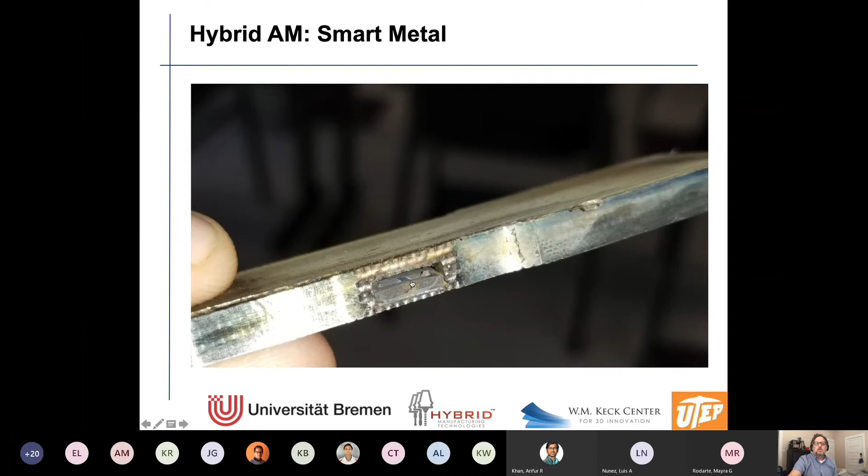And so while we built it, we got data. After we built it, we got end use data, and that's pretty cool. And then my friends in South Africa looked at the bad ones, and you can see that's that little conductor, and it popped off because the laser cladding just heated it up too much, and it was destroyed.

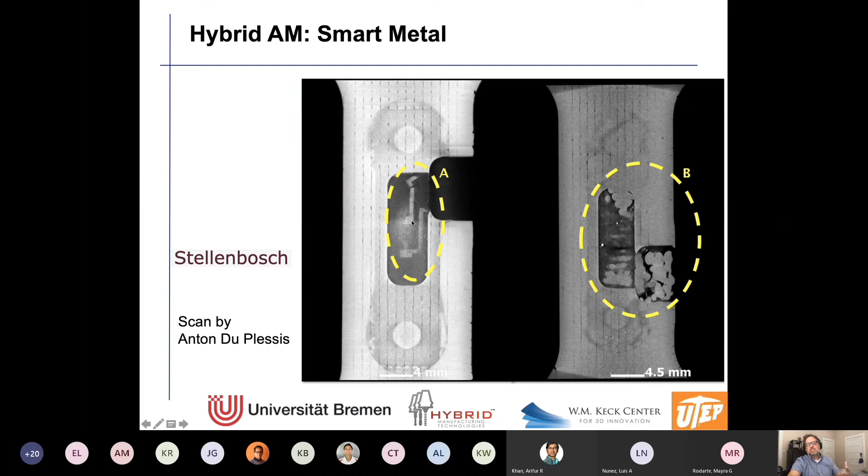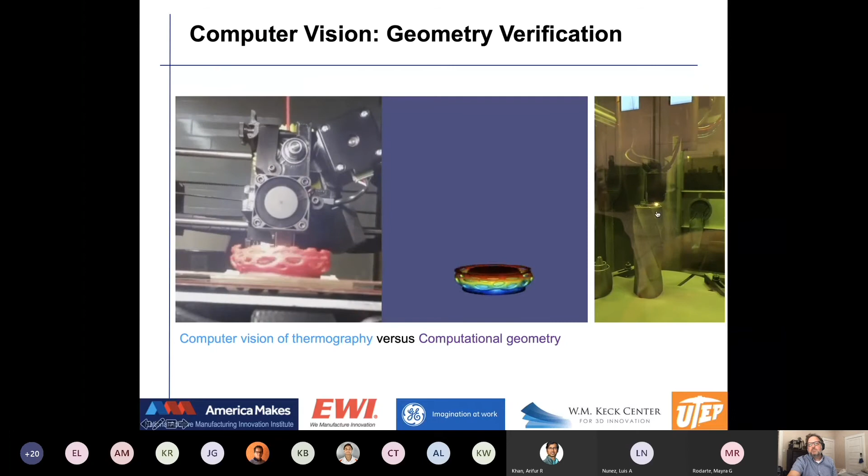And then this is cool. This is actually Frank Medina before he was at UTEP, or as a professor anyway. This is another type of laser cladding. And what I want to do here is, the cool thing about directed energy deposition is I have an unobstructed view of the object. This is just a Lulzbot printer.

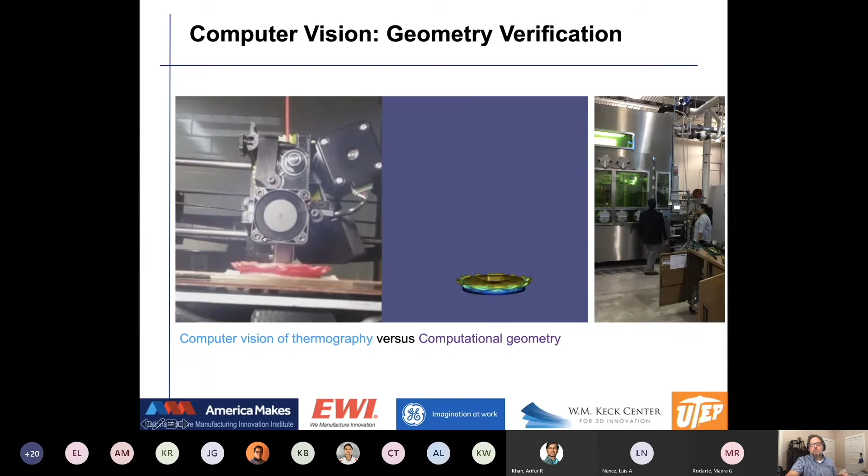And I took that STL and I used computational geometry to say, from this location and at layer 5, 6, 7, what should I see? And then I colorized it just based on the Z height, just to make it look cool, because it should be hotter on the top. But I can compare these 2 things, the geometry and the actual image per layer. And I could say, yeah, you got deformation or you're going bad. Now, you would never do that necessarily for this cheap $1,000 printer.

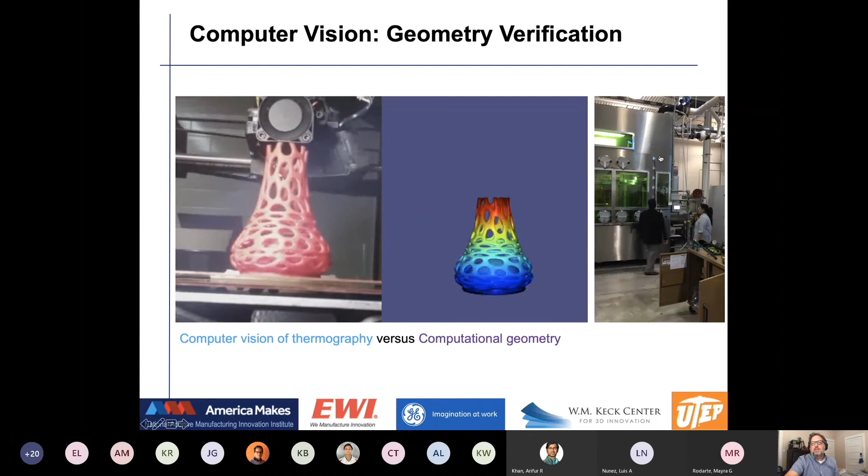And that's Medina. And this is an RPM system. And this is just a monster DED. This is one of the best 3D printers on earth. You fill this whole chamber with argon, and it's just got a laser, and oh, it's so cool. Anyway, Frank got this, and then he came to UTEP afterwards. And I worked on it after he left the Edison Welding Institute in Columbus, working with GE Global Research in Albany. Speaking of which, a lot of thermography.

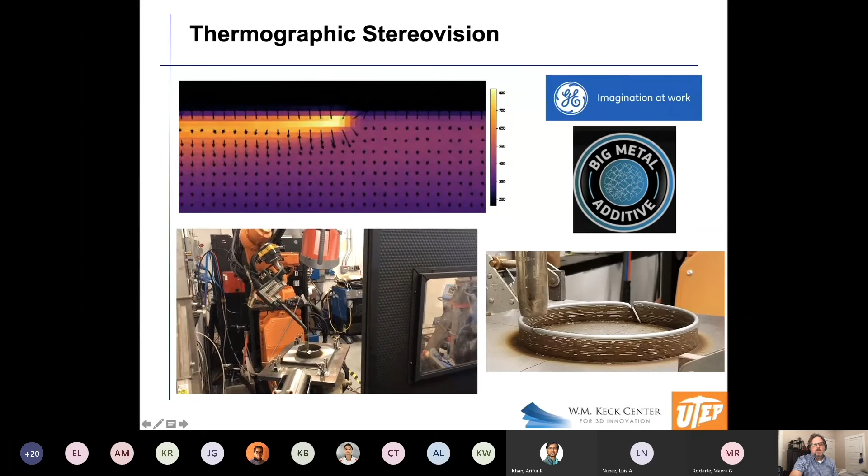So this is an image of just a melt pool from directed energy deposition. This is a CMT welder on a 6-axis robot, and it's about to start building that cylinder. You see that's bright. So I'm going to do thermographic stereovision, where I can actually get 2 cameras.

That's one. I'd get another one here, and I could actually watch in two different perspectives the temperature up to 2,000 degrees Celsius. But because I could do stereo vision with two cameras, I can tell you where the melt pool is in 3D space over a time period.

And there's a company in Colorado, Big Metal Additive, that does wire aluminum DED with machining. They just did these marine landing pods that they tested at Camp Pendleton in Southern California, and it really went well. And I'm trying to get into their shop. They're near the Colorado School of Mines near Denver, and put these cameras in there and just collect a lot of data where I could see where their welder is in time and in XYZ space and in temperature, and then recreate data that I don't think anybody else has ever done.

I've never heard of anybody doing thermographic stereovision. So I'm really concerned, because I've mentioned it at least 10 times in the last 10 months, that I'm about to get scooped. So I'm accelerating this. My foot is on the accelerator for sure. And it's a cool application of computer vision.

So this right here, these arrows we superimpose, that's the thermal gradients. And my friends at GE, that's what they're really interested in. It isn't so much the temperature, but the change in the temperature and the direction of the change in temperature and how that affects the metallurgy, which of course I don't know anything about, but I enjoy working with people that do. And then I guess I'm done. I hope that wasn't too long.

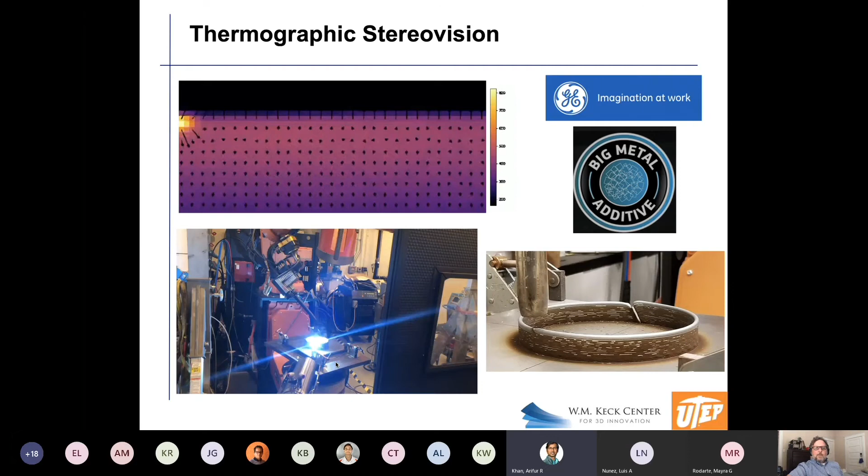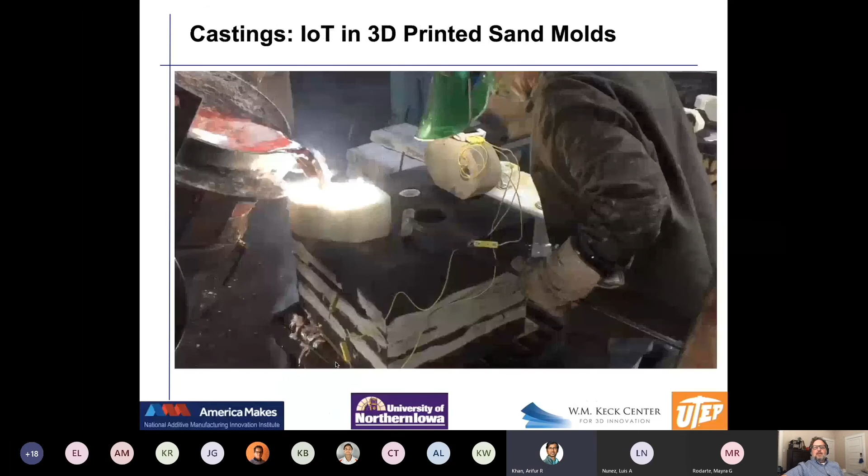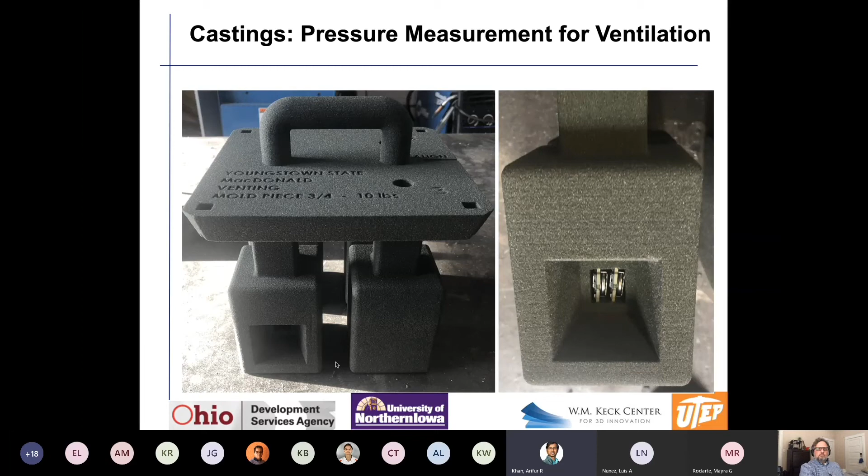So you are working on many 3D printed systems and IoT and electronic sensors, etc. You're talking about the sand casting. And my question is related to the application of this for space or satellites, or maybe satellite-related electronic sensors for our future, so that we can survive if there is any Star Wars or something like that.

Well, yeah, okay. So this PEEK, it turns out, is space qualified. That's one of the reasons why I picked this. So this has got satellite written all over it.

The problem is it's hard to print because it has a high temperature. But yeah, back in 2013 at UTEP, working with the University of New Mexico, we had a small piece that was put into a CubeSat and flown into space. And a facsimile of that was actually put in the London Museum of Science, the oldest science museum on Earth, and was shown as an exhibit, which is kind of cool.

It was right next to that gun that UT Austin student had printed. It got confiscated. But in any case, satellite is definitely any kind of space, aerospace applications. If you got something for me, let's go for sure. I know that Joel Quintana and I have been talking for sure. And he has a launch next year, right?

Right. And the reason I'm talking this issue is because I'm from Japan, right? I have been there for almost 16 years, and I worked on many satellites. I developed many electronics and sensors, but I have a very strong desire to work on that, so that we can apply this technology for the space applications.

I love it. I have a huge knowledge on the space environment, how electronics works there, and my dream idea is, in space there is a lot of plasma, right? So my objective, that is my dream, is that I can use this plasma to accumulate the charge in a 3D printing system, maybe capacitive or inductive, whatever it is. And then we can use this energy to charge our battery when we are going for deep exploration, where the sun is not the source.

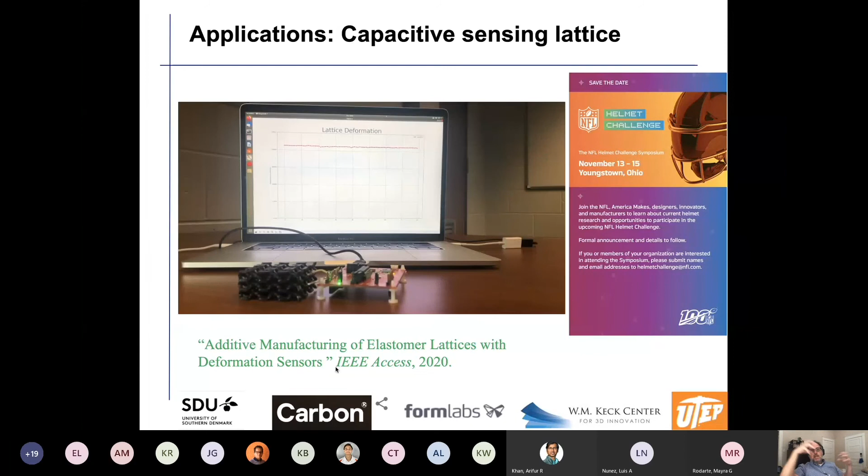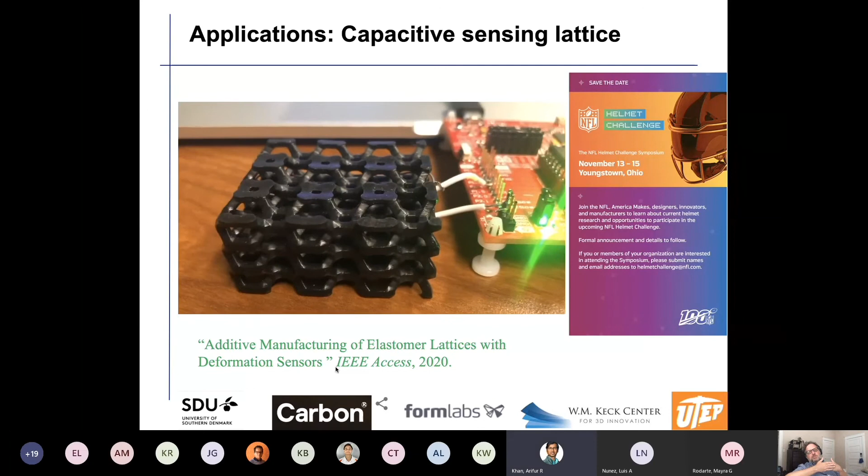So anything that has to do with space, I get real excited about. I don't really know much about it. I was a chip designer in the 90s, and I did work on radiation hardened microelectronics. So I understand rad hard stuff, where the radiation of space can cause little bits to flip, soft errors. And gosh, we had another project where we did plastic with tungsten powder embedded to shield X-rays and radiation. And we proved at Sandia National Labs that we could do that.

I think there's so many applications. And I can tell you that, yeah, I picked PEEK. One of the reasons why I was so excited about this material is because it's one of the 3 thermoplastics that's allowed to be used in space. So Ultem, PEEK, and PEKK are the 3 that are currently space qualified by NASA. If I show them a polycarbonate with all these electronics in it, they're just like, we don't care, that's boring. I show them this and they start shaking. It looks like it's really weak, but this stuff is just amazing.

No, we have a huge area where we can explore this type of conditions, or we can design something, propose something, we can design some prototype to test it. I have a huge knowledge on testing of space materials. I can share my knowledge with you, and if you allow me to meet face to face, probably we can talk more detail on that.

Definitely. All right, you're on, man. We'll publish like mad. There is a huge area in that field actually. We can work. And if we could get funding, definitely, no doubt. Yeah, no doubt. Get some massive funding. Pay for some of these students. Yeah, definitely. I'm totally on board, man.

Let's go. I'm sending an email request so that we can find a common time, and please give me 30 minutes to 1 hour so that we can talk on that issue and design something together. On it. We'll do it. Thank you very much. I'm really, really very excited on that. Thank you very much, Dr.

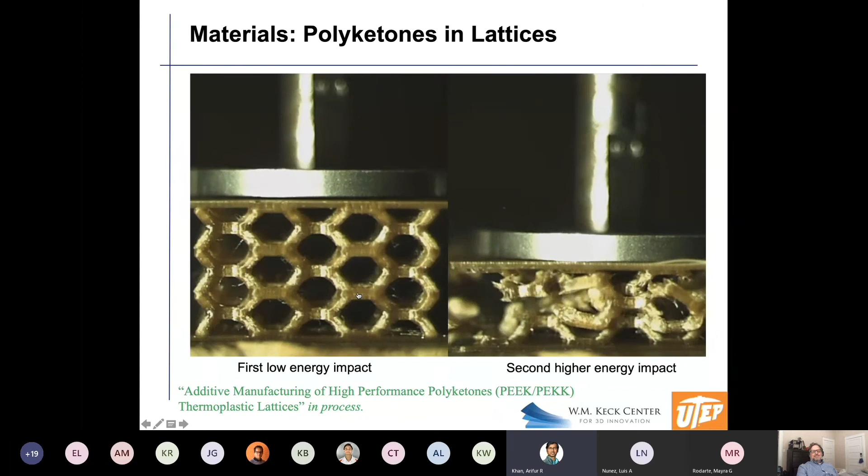We did get some questions in the chat about working for the Keck and needing a social security number for students who are Mexican citizens or not U.S. citizens. And I will say that if you do get a position at UTEP, you can go to the OIP office and they will help you get your paperwork done. So that shouldn't be an issue as long as you have your offer letter.

I will also say that the Keck Center recently sent out a flyer. They are looking for undergraduate students who are and are not U.S. citizens. So some of their projects you will need to be a U.S. citizen, but not for all of them. So don't let that be a deciding factor for you.

And I typed in the chat the emails where you're supposed to send your resumes. I did see that they got a good amount, so I think they're still sifting through them. So maybe just give them a little more time to reach out to you to see if you were one of the students selected for a position.

And we did get another question, Dr. MacDonald, if there are any requirements or possibilities to work with you specifically in your research. Gosh, not really. No, I mean, just like a lot of passion, right? You can see that I'm kind of hardwired with a lot of energy. And so I tend to be very aggressive about pursuing things.

I worry that people are about to steal my ideas. And so I'm constantly just go, go, go. And it's probably unhealthy. I probably work a little too hard, but I like to be hyper productive. So that's the main thing, is if somebody's really passionate about this and wants to do something remarkable, then that's what I would recommend. And some of my best research students were certainly from Mexico.